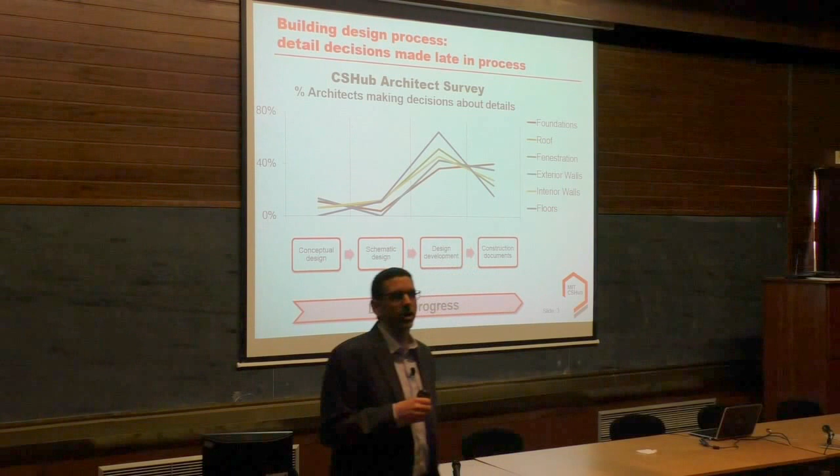And in the US, we have lots of open space and lots of opportunity to build new buildings, and so that's what happens quite a bit. The other thing, though, that's interesting combined with that, we did some work trying to understand a little bit about how decisions were made in the building process. And what we did is we did some surveys of architects and asked them about when in the design process are they making decisions about what they're going to be doing with that design.

So for example, we asked them, when do you finalize what kind of foundation you're going to use, or what you're going to use for the roof, or fenestrations, which is about windows. When do you make those in terms of these elements of the design process? So you start out with the conceptual design where you have a very rough idea of what it is that you're going to be doing, then move on, gradually adding more and more detail.

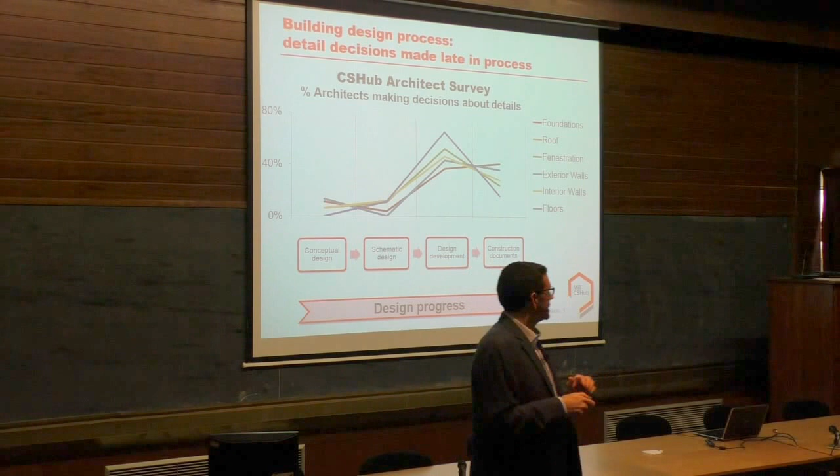And what you can see in terms of the survey is that very few architects actually have a lot of details specified early in the design process. Rather, they are making final decisions about those late in the design process. So the reason why we were asking about this is because a tool like life cycle assessment should be used to support decisions. And the challenge here is that this is when they're considering what to do with those decisions, and then this is when they're actually making them.

Maybe some of you are familiar with a BIM process, which is basically a more automated process by which you define what materials are being used. They're trying to get that earlier. But the easiest place to make changes to the design is early in that process. But here's the issue: most of the life cycle assessments are done using detailed designs. As a matter of fact, I would argue that when it comes to buildings, most of the life cycle assessments you see are really done on final designed buildings.

And the interesting thing is that that's when you have very little opportunity to actually make changes to the design. So essentially right now, a lot of times those life cycle assessments are done basically to justify decisions that have already been made. To be honest, that's a common evolution we've seen in life cycle assessment: originally you do it just to demonstrate the process, and ultimately moving it to a place where you can support decisions is more challenging.

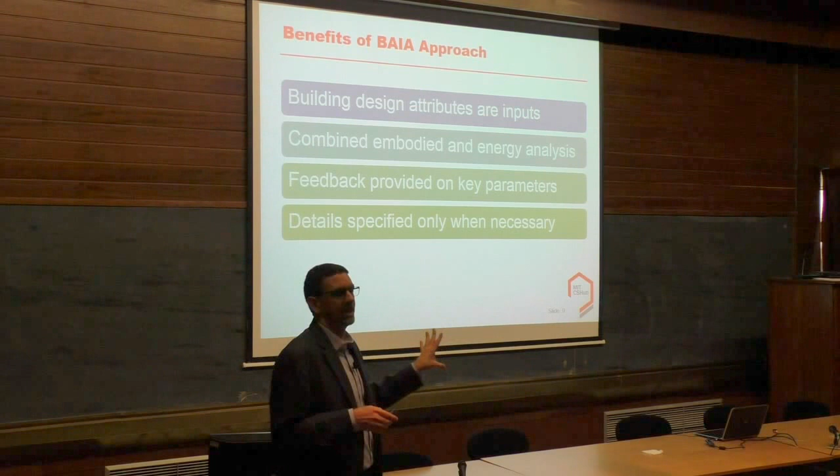The other thing that we do is we provide feedback on what are the key parameters, and you don't usually see that in a life cycle assessment either, right? But we're able to provide that because of the probabilistic nature of the analysis. Another thing, the user only has to specify the details that really are necessary in order to get the answer they're looking for. Everything else they can just keep generic. You don't have to be detailed about everything. And lastly, we quantify uncertainty, and we think that particularly when it comes to life cycle assessment, this quantification of uncertainty is really important. So, all right.

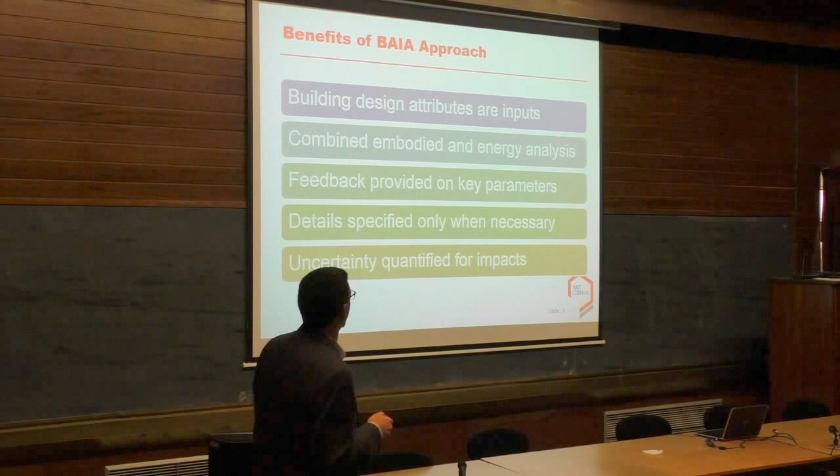So what I'm going to do is basically go through each one of these to describe a little bit more what's under the hood. So I'm going to start with this attribute to activity modeling, right? When I'm talking about an activity, once again, it's basically going to be this bill of activities, and you'll see what I mean by attributes. We have a couple different ways that we estimate bill of activities, but essentially the kind of attributes that we're asking the designer to specify are: tell me about the rough geometry of the building, what are you thinking about in terms of wall systems, attic and roof, the things that an architect would already be specifying. Then we have an energy attribute to activity model and one for materials as well.

And essentially what we do is we take all those attributes and then we have a model that we use to calculate what's the energy consumption of the building, okay? Then we have a different one where we basically use those same attributes to specify what are the materials that are in the building. So, the key thing is we want to be able to do this in an efficient manner, okay?

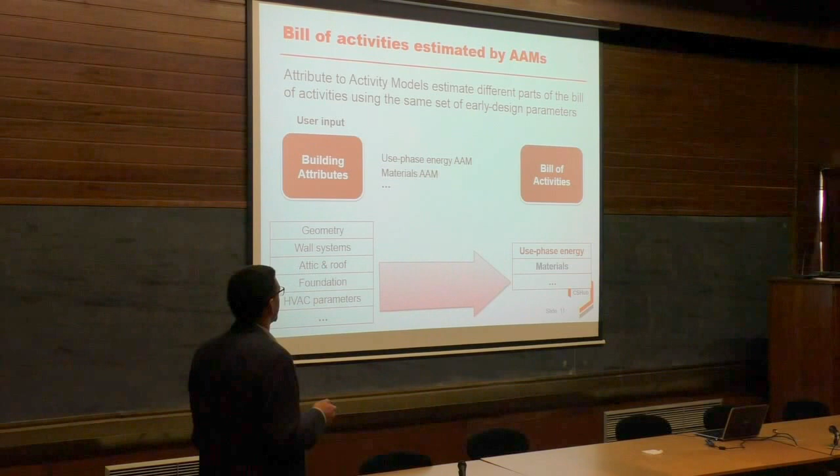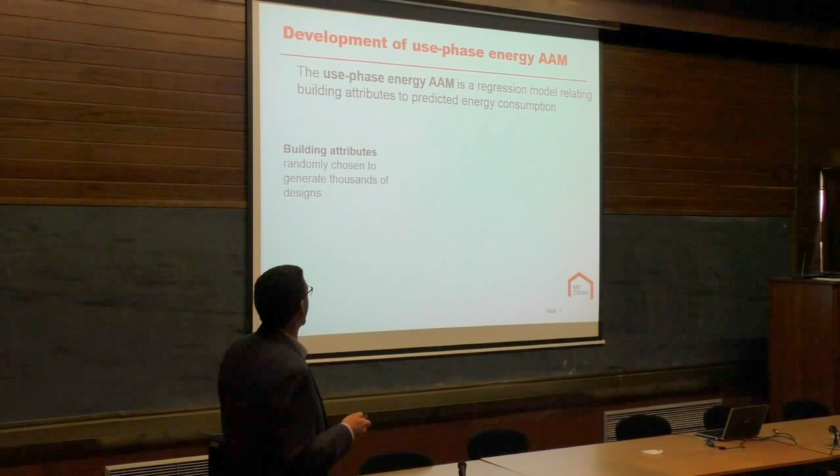So the use phase attribute to activity model, that's probably the one that's the most tricky usually to specify, because a lot of times in order to get energy consumption information, it requires a lot of simulations. And so to develop this model, we use this program called EnergyPlus, which is common in the US, developed by the US Department of Energy. And it's a simulation tool that you use.

What we did is we generated thousands of different designs, then ran EnergyPlus simulations, and then predicted energy consumption for each one. Then we developed a regression model that said out of all those thousands of runs, we can then have a statistical model we use to connect those attributes to the output.

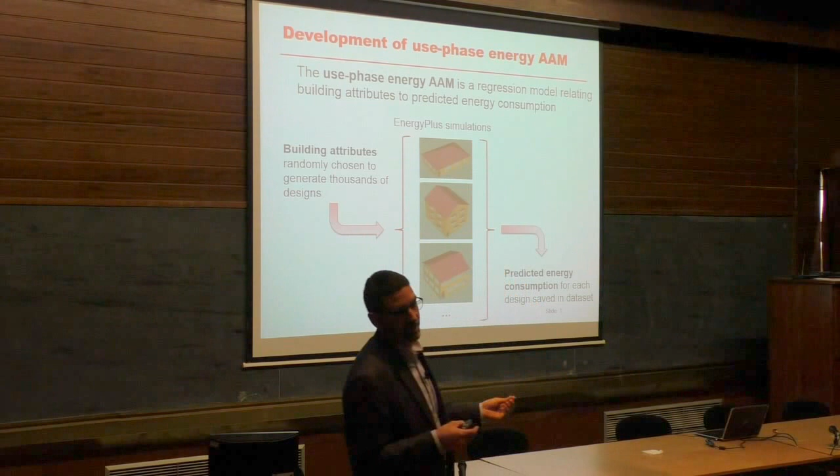So it's not as perfect a simulation as what you have if you were to use the actual model, but developing that regression model means it's very fast. It's almost instantaneous. And so when we're going to be using our tool, that's much more efficient.

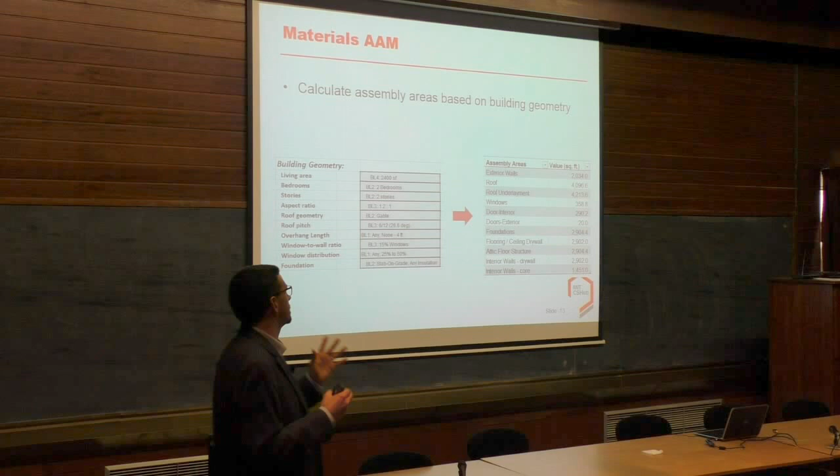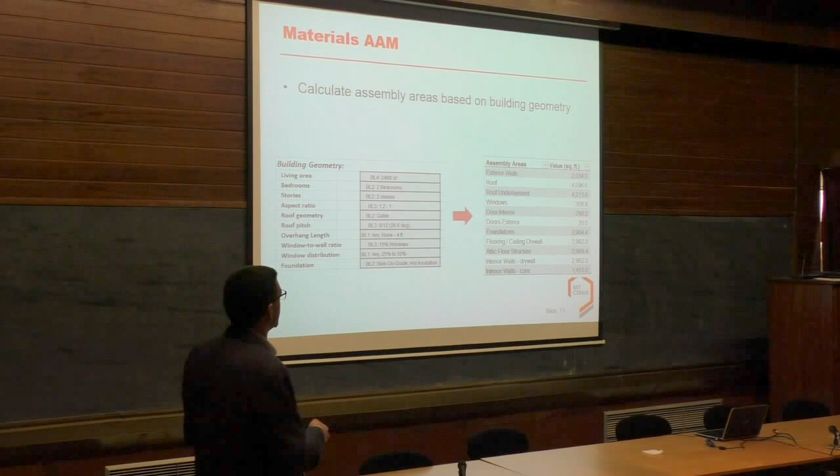When it comes to the materials attribute to activity model, it's a bit more straightforward. We basically are just calculating the areas of assemblies. So if you tell us this kind of geometry, what are aspect ratios, roof pitch, things like that, we just use that to calculate assembly areas. So it's a bit more straightforward. It still requires some calculations, but that is how that works.

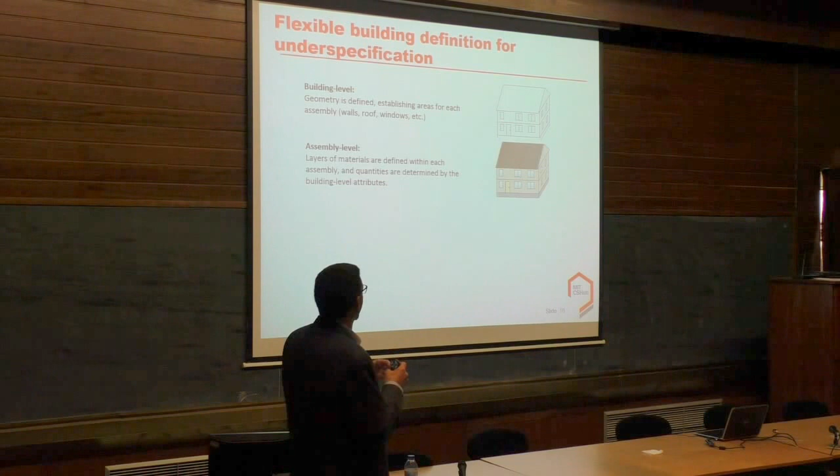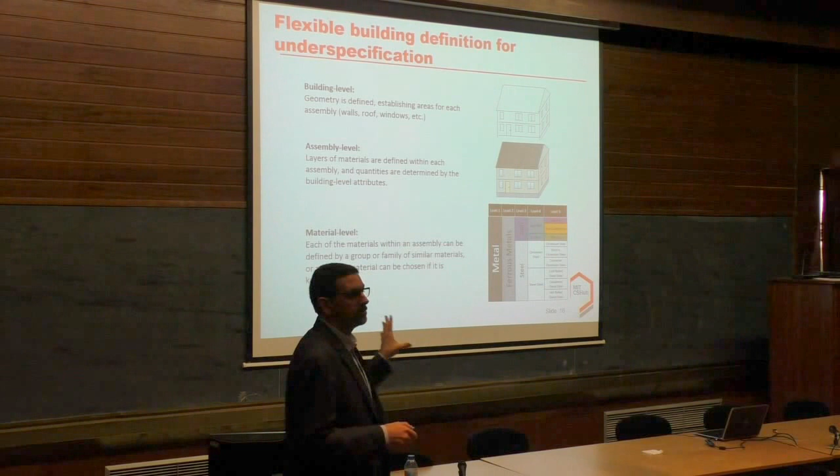Similarly, when it comes to specific assemblies, you don't have to tell me exactly what kind of wall system. You can just give me a rough approximation of the wall system or what kind of roof. And then when it comes to the specific materials you're using, similarly, you don't have to tell me exactly which materials are in your wall system.

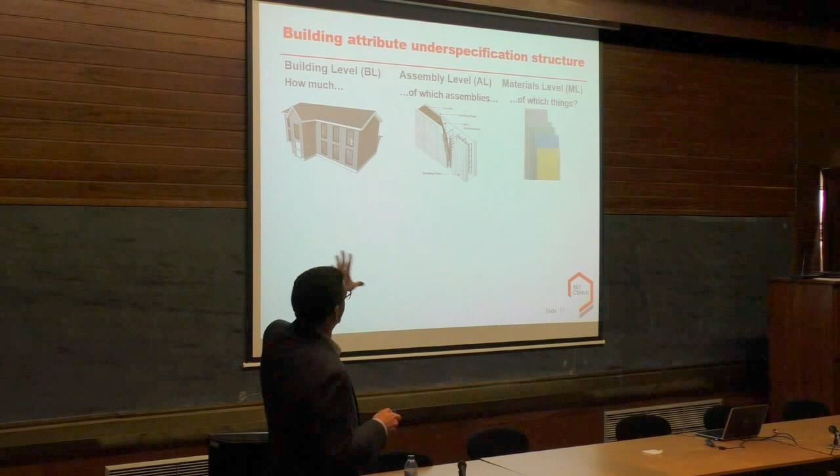Just say it's just some kind of insulation. So that's how the underspecification works there. Just giving a few more examples: at the building level, we're essentially saying how much of which assemblies, and then at the assembly level and the material level, of which specific things.

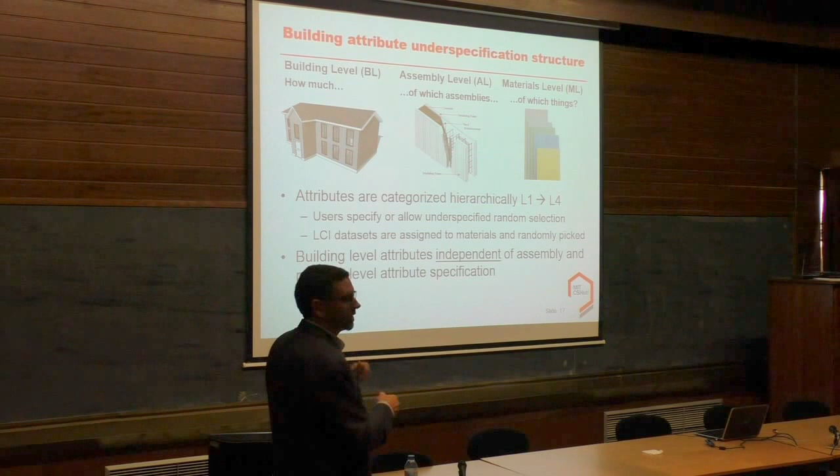So we've set up categories of L1 to L4, and then users will specify, or basically just have it be completely underspecified, which means they just choose the most generic category of L1. And a key thing here is that these building level attributes are independent of the assembly and material level attribute specification. Remember, this is basically saying how much of something you're using, and this is exactly of which type. So you could say, I want to choose a very specific wall, but I don't know exactly what size the wall is going to be. So those things are independent.

So here are some examples. When it comes to the geometry of the house, building level 1, which would be the most generic, you can just say any size house. At least in the US, we have data on the main ranges of the size of houses. The next one would be, I just know I want a medium-sized house. Then it could be on the smaller size, and the most specific would be, here's exactly the size of the house.

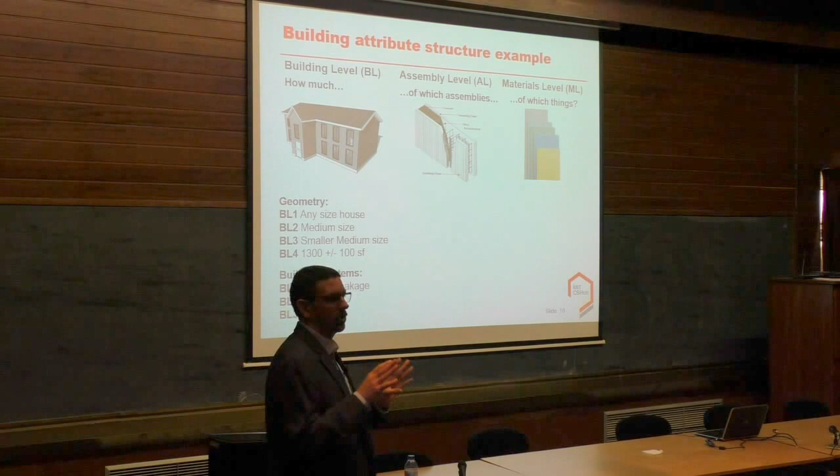We can do the same thing with the building systems, like the heating and cooling systems. In particular, air leakage has a big impact on how much energy you're using. So you could be generic and just say, I know it's going to be low air leakage, or you can say a very specific amount.

We can do similar things with the exterior walls. There are different elements that you define of the walls. Within the wall core, the generic one would be any kind of wall system, and then these would be more specific. This one is insulated concrete forms, where they use insulation on either side and then concrete goes in the middle. Within that rigid insulation part, you could specify exactly what kind, or say I just know I want rigid insulation, or get more and more specific. So hopefully that gives you the idea.

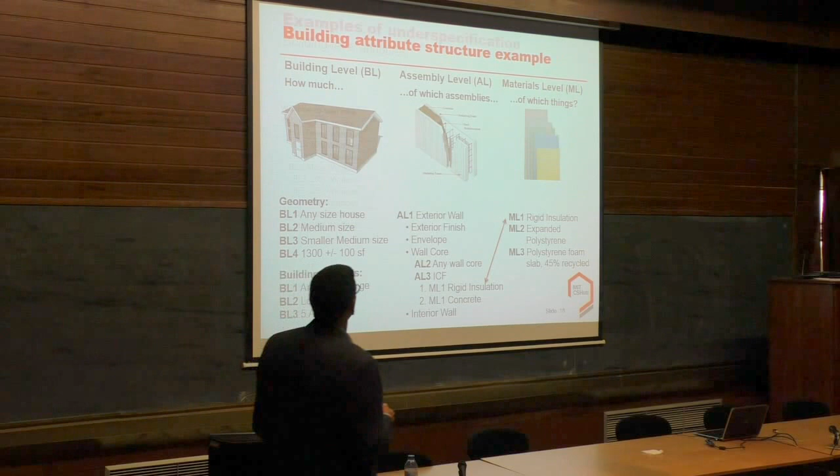We have other examples here. At the building level, you can do window to wall ratios, roof pitch, or overhang length, with many different options. When it comes to assembly level attributes, there are all sorts of types of exterior walls: insulated concrete forms, structural insulated panels, concrete masonry units. Within insulated concrete forms, there are different sizes and different types of insulation you can use, so it's a lot of combinations.

This is a snapshot of how we've implemented it in a spreadsheet, but basically once you choose some of these groups, you can go in and choose specifically what kinds of materials you want. Or, as I said, you can also just leave it very generic and say, I don't know. So those are some of the different options.

All right, last but not least, probabilistic triage. It's a bit of a fancy word for essentially a sensitivity analysis, and the reason we do it is to identify the influential attributes in this model. The technique we specifically use is Spearman rank correlation coefficients, which provide an approximation of the contribution to variance. So when you do an analysis, you don't just get the uncertainty, you also get a ranking of which specific attributes contribute the most.

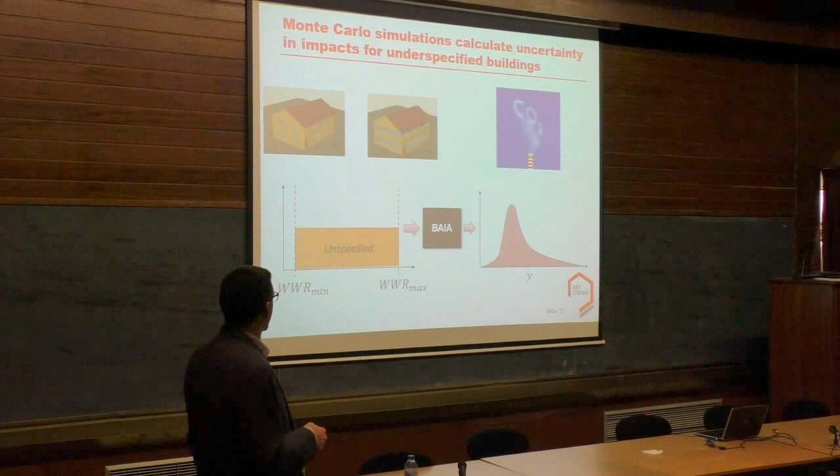When the Monte Carlo analyses take place, we just have a uniform distribution. We don't have information on any weighting we can use, so a whole bunch of trials are run and we get a distribution. If you decide you want to specify that further, let's say you knew you wanted a low value, we can run it again, and likely we'll get a narrower distribution on our results. So that's the idea behind what we're doing.

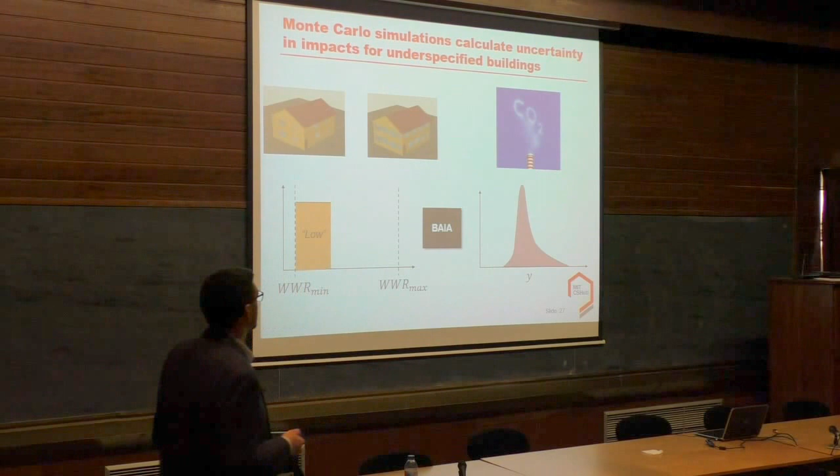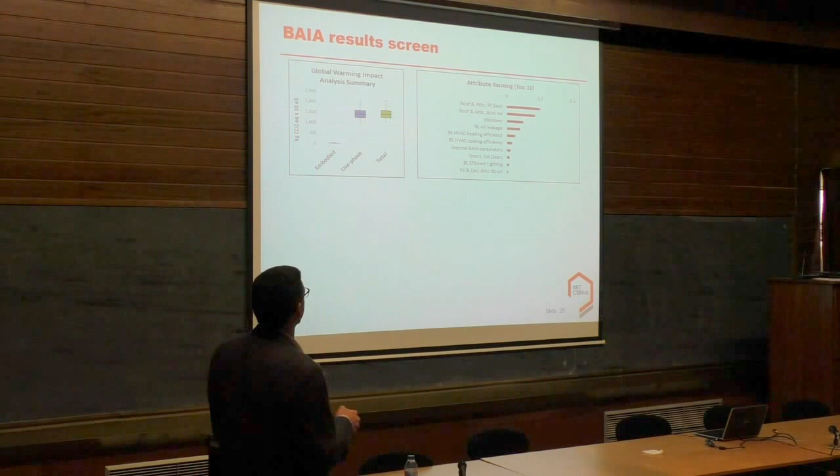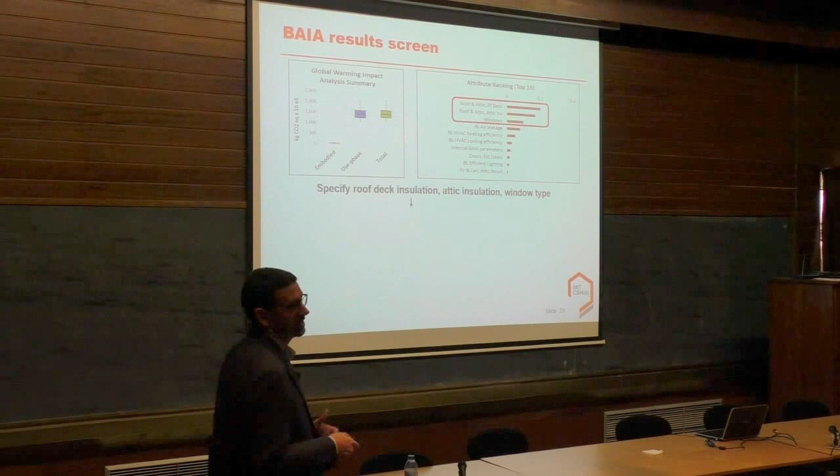As I mentioned, the kind of results you would get: if you do it completely unspecified, you get a certain amount of embodied impact, the use phase, and the total, but you get these attributes. Then you can spend more time specifying these three parameters that are mostly about insulation and window types, which, given how dominant the use phase is, are parameters that are going to impact that.

Then you can run it again, and you see you get a lower environmental impact compared to what you have there. And now you have other parameters at the top of the rankings. So depending on what you're interested in, you can run it again. Let me give you an example here that shows a house, where we choose an analysis period of 60 years in Chicago.

Some things you can specify. Let's say you're a designer and you already know you're going to do a house of this size. You know you want 3 bedrooms and 2 stories, which are common things a designer would know. But you might not know yet what material you're going to use in the walls, or what kind of HVAC, heating, ventilation, and air conditioning equipment you're going to use. So you run it for the first time, and you get these results in terms of global warming potential for embodied, use phase, and total.

And as we said, what it tells you is, in this case again, specifying the insulation in the attic and the insulation in the roof deck and the windows. Those are key elements. So let's say then we decide, I'm going to use this specific type of insulation in the attic. I'm actually going to choose no roof insulation, and then these specific types of windows. So I go to the next level of specification for those, and then with run 2, now I've specified those, you can see the uncertainty goes down quite a bit.

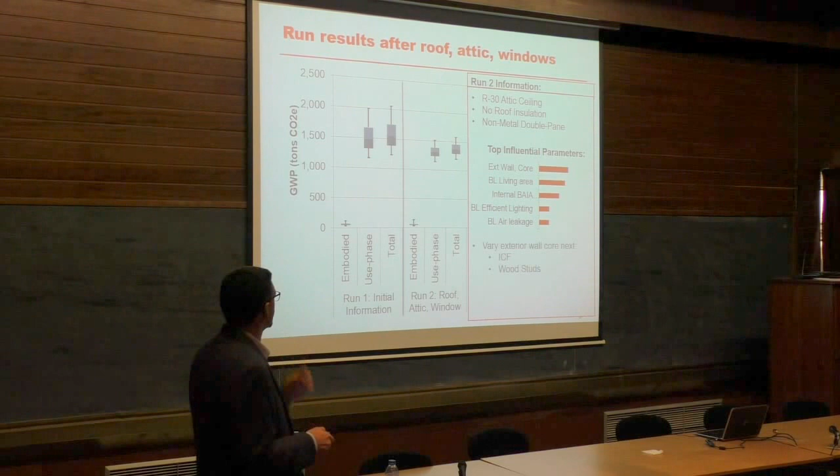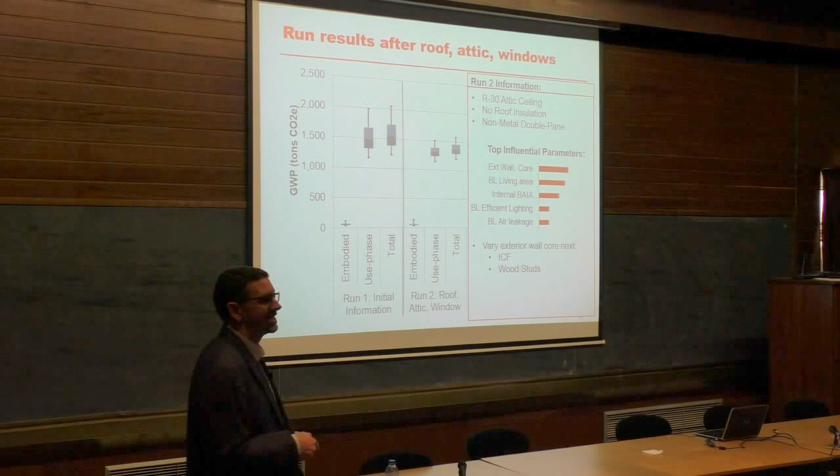And now I have different parameters that are the most influential. And so the next thing I'm going to do is basically, I found that on the exterior wall, specifically what I chose for that core material has the biggest impact. And so the next thing I specify is I want to look at a couple different options. One is using these insulated concrete forms, and the other one is using wood studs. So what I can see with that here are 2 runs, one where I've done it with insulated concrete forms, and one where I've done it with the wood studs.

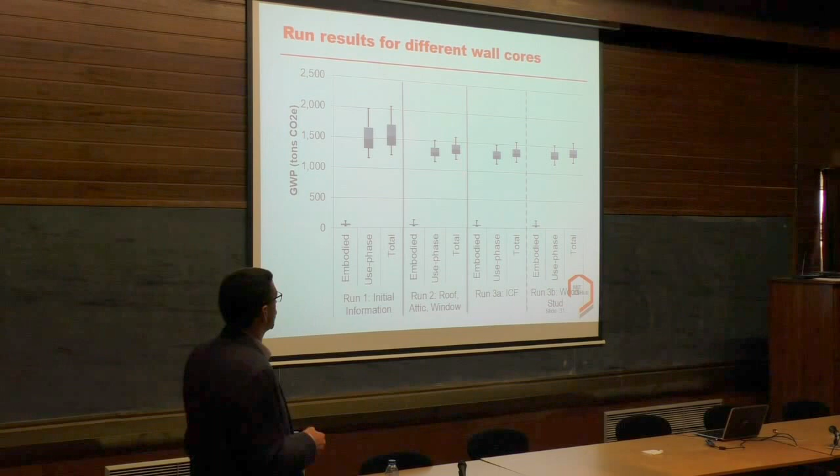And it's actually just not that big of a difference. And also what's interesting, you don't get nearly the same amount of reduction in uncertainty as you do with that first phase where you specified those first few parameters. So now we can see the total global warming potential across all those different runs, where, as I said, uncertainty dropped quite a bit for here, but then from run 2 to these runs 3 is not quite so much, but still there's definitely some. You can compare these 2 alternatives, and that can hopefully support some of your decisions.

So once again, just to wrap up, I want to emphasize some of the benefits of the approach. You get these building design attributes as the inputs. You have this combined energy and embodied analysis. You get the feedback on what are the key parameters. You only need to specify the details when they're necessary. And then lastly, we get that uncertainty quantified for the environmental impact.

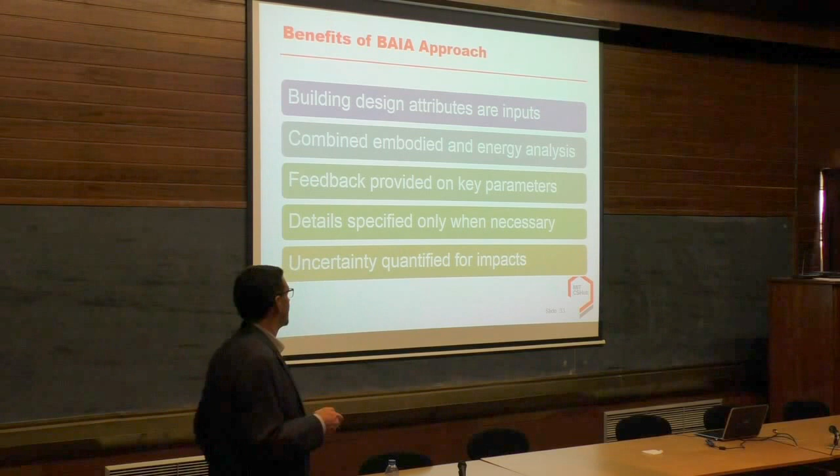So we think this is a tool that can be used to guide those early design decisions when you don't have all that information available, and it can be used in those early design stages and can capture uncertainty. And I think a key thing is that basically there are certain things that you just don't need to specify in terms of that overall environmental impact, and that can be something very useful. So we have a tool developed for residential.

What we're doing now is making sure that we have all the data we need for all the life cycle stages, like I didn't talk about end of life there, or some of the construction impacts, and so we're adding those. What we're also doing then is trying to analyze a wide range of scenarios to really figure out, when we look at all these different scenarios for different types of buildings in different locations, what are the things that keep coming up? What are the things that really matter and can drive that?